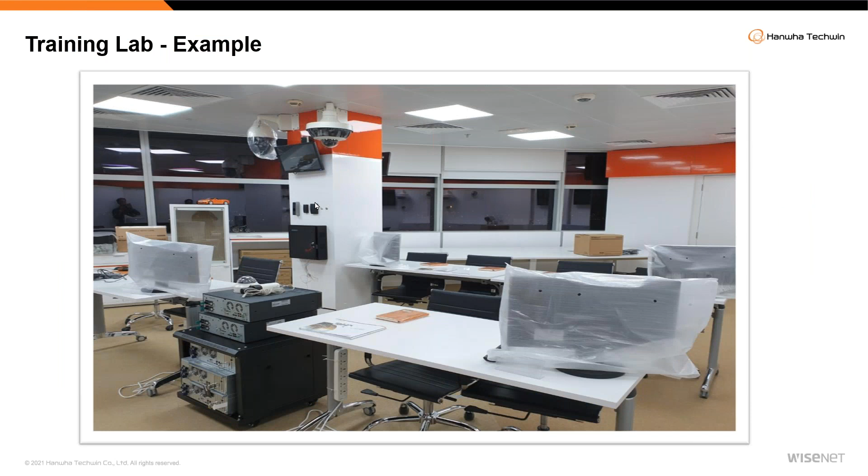Training labs - this picture is just to give you an example. It's an old picture; a lot of updates have taken place since then. Just to have a look and feel of the cameras, you can see the guys here installing the camera, plugging it in, with the NVRs set up, getting a good feel of the products.

All right, next is vendor manufacturing and quality process. Just have a look at the video, and then I will take it from there.

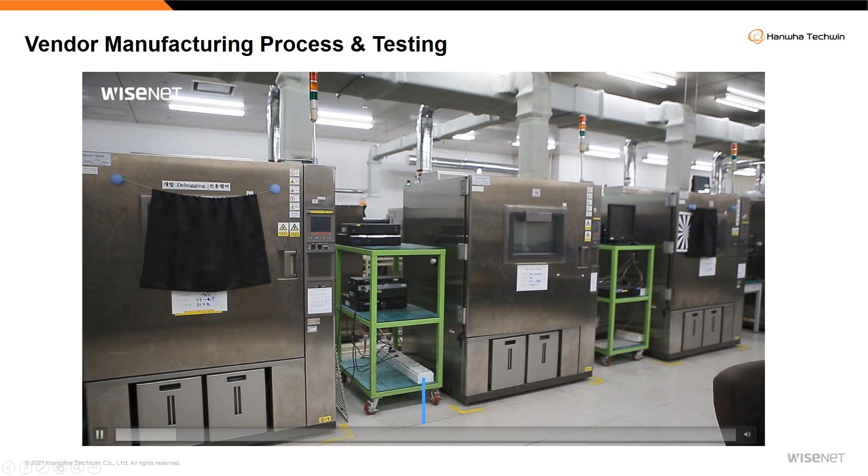So what all did you see, starting with the camera and the initial testings? For example, every camera that is being manufactured goes through 7 stages or 5 stages, depending on the vendor policy. The initial stage is to gather the requirements and specify the camera, what it should handle, how it should handle, what conditions it should operate in. Then they develop it, test it, go back again, add components if testing failed, and test it again. It's a cycle before the final product gets released.

Here is a sample of a lab where you see chambers for testing camera reliability, if the temperature increases above a certain level, if the humidity increases above a certain level, or both at the same time. These are called ALT testing. Then there is HALT testing. Some vendors test only temperature increasing, then close it, then test only humidity increasing. But some vendors test both separately as well as both at the same time together. What if both go wrong at the same time?

These are certain points done as part of manufacturing and testing, and they have nice documentation uploaded on their website. You can download and check it. That gives you some insight on how the vendor is performing. Or if you get a privilege or option to go and visit the vendor facility, you will also be able to witness this live.

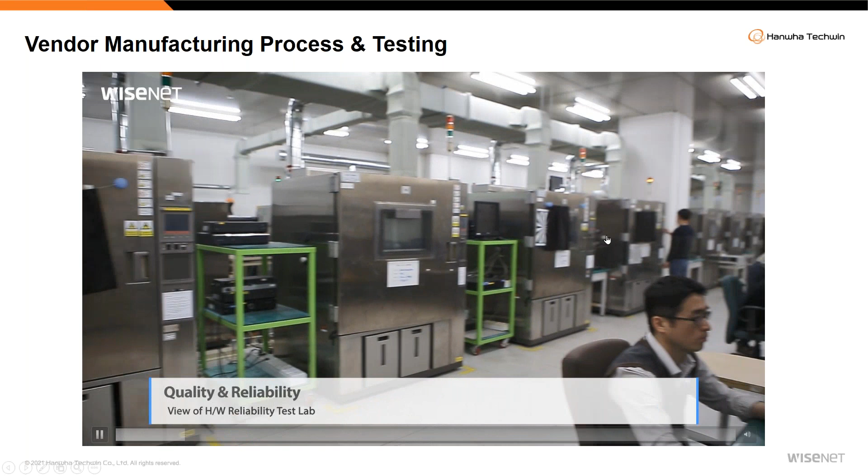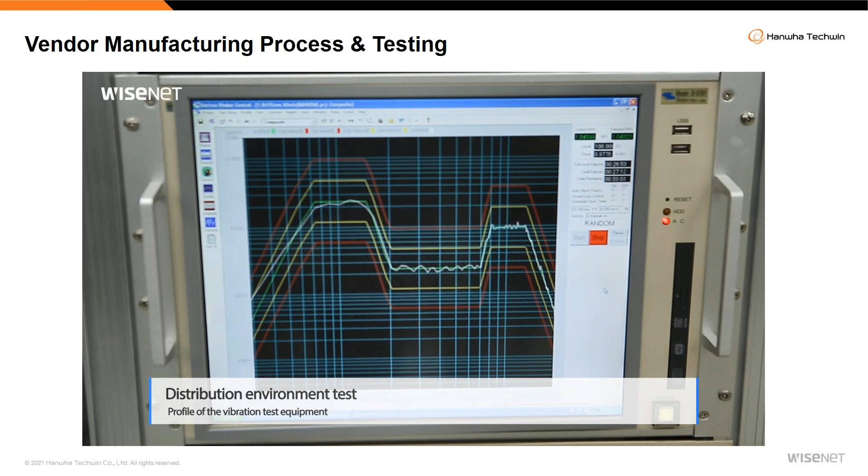Then there are tests like drop testing and vibration testing. So with drop testing - what if during transportation, which is not the responsibility of the vendor, the RAM card or the chipset falls away? You will get a dead on arrival camera, dead on arrival NVR. Sometimes when you unbox and plug in the server, there's no response, the screen is blank. Why? Because some card fell off during transportation, or maybe they accidentally threw the box, so it could happen.

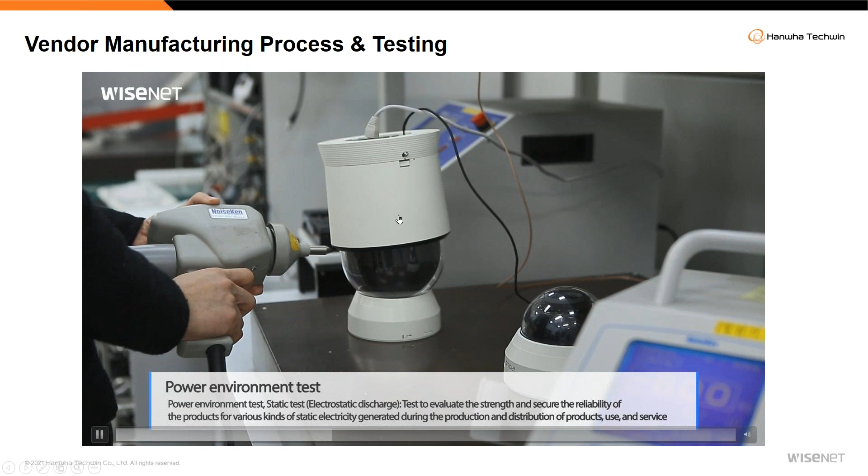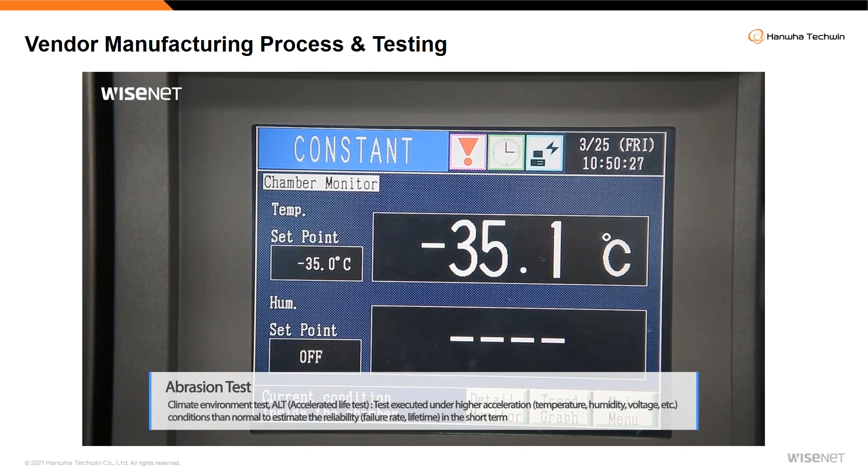Then surge protection - what if someone accidentally powers the wrong power supply? Will the camera blast off? These are certain things a vendor tests to make sure that the product, when it reaches you, even if it goes through some accidents, is still alive and running. What is the worst case scenario? If the camera is dead on arrival, there is a lot of time lost for you to call and figure out the process for returning it. So all this can be eliminated when quality and testing teams do a little bit of extra effort to make sure the product is in the same condition as shipped.

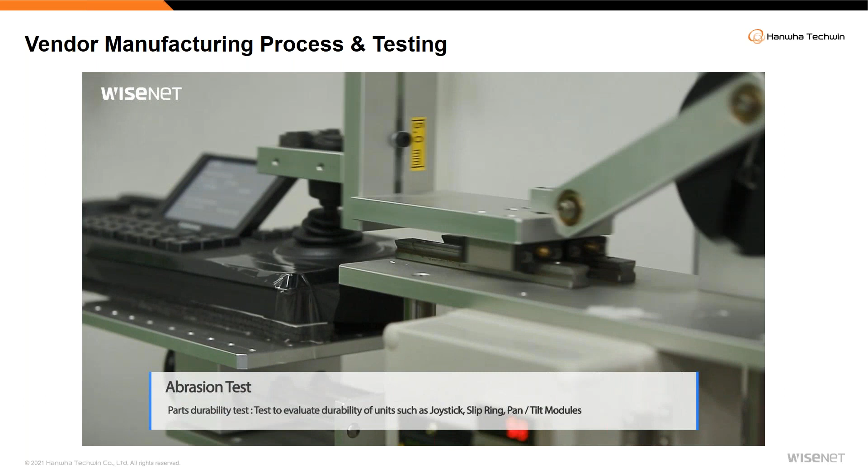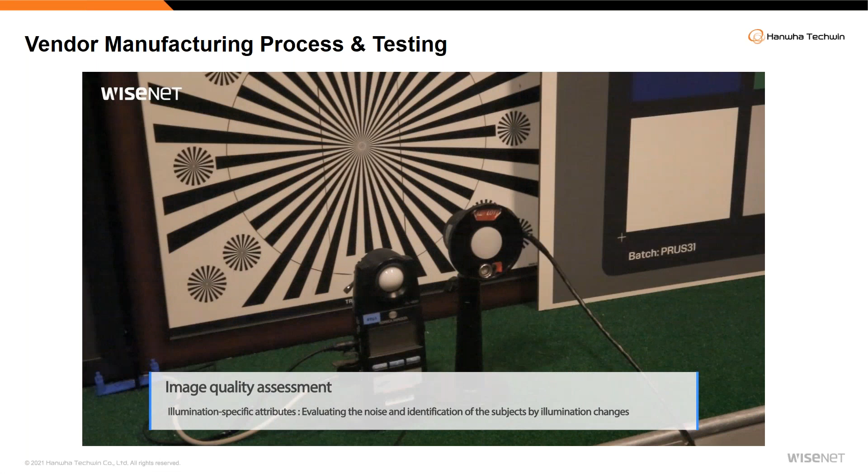Then of course, image quality testing. This is diverse - every vendor has their own method, own programmers, own software developers, how they define imaging. This is something you have to witness to see. But generally, how good it can differentiate the color, how good it can reproduce the color, how good it can perform in daytime, nighttime, and different lighting conditions - these are the things they go through.

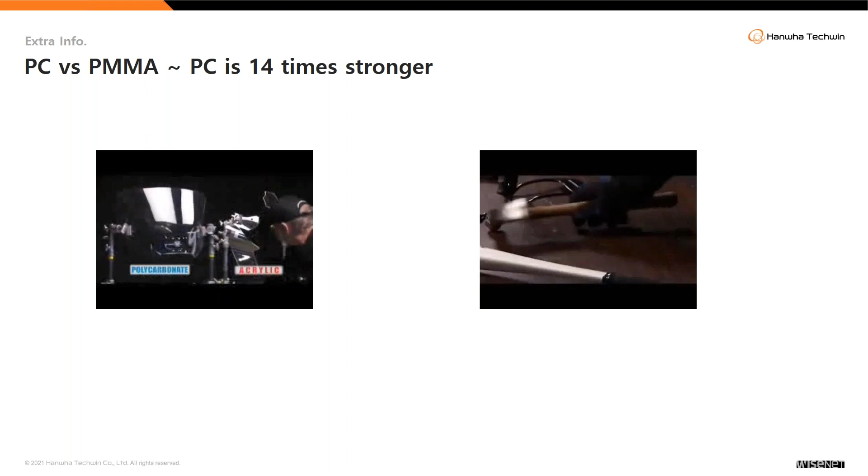So here the guy is taking a stone and throwing it - watch this video. A normal glass bubble breaks, but if it's polycarbonate, you can see the impact - he's throwing it with the same force, and it withstands. Another example: glass with a hammer breaks, again with the hammer on the glass it breaks. What about polycarbonate? It withstands. So they're both used for the bubble of the camera.

Standard can break, vandal resistant can withstand. If the camera is at a reachable height, you must use vandal resistant. If the ceiling height is very low, you must use vandal resistant. If the camera is installed outdoors, you must use vandal resistant.

Next is fixed lens, varifocal lens, and zoom lens. Fixed lens - let me take an example. Okay, now mind.

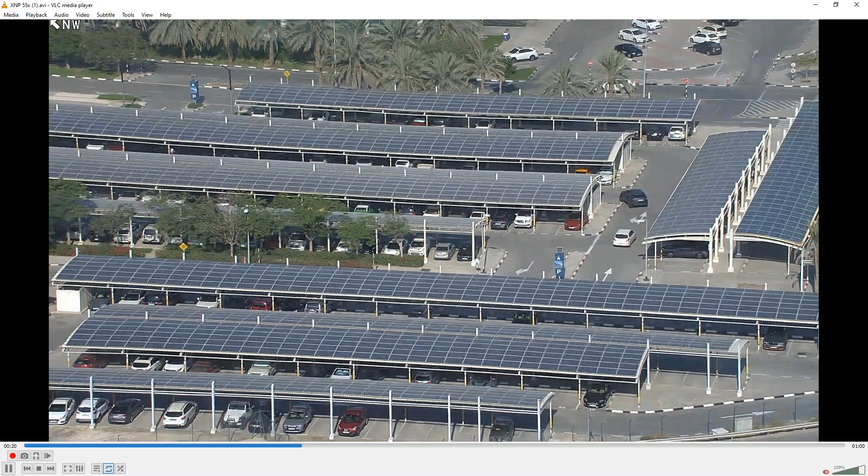Okay, next is a zoom lens. The objective of a zoom lens is, let's say, when you want to zoom a very long distance, more than 100 meters, up to 500 meters, and capture the details of a car or a person, then you use a zoom camera. These zoom lenses are quite big, so they usually come in bigger sized cameras called pan tilt zoom cameras.

What is a pan tilt zoom? Right now I zoomed in and zoomed out—you can see I'm zooming out almost a kilometer now. I saw a car moving and wanted to see the number plate, so I click on that area and it starts to zoom in so I can see the number plate. I can even move the camera left and right—I'm moving it slightly to the right now.

Okay, one more example. Zooming in, I can move the camera as I please. This is called pan, tilt, zoom - move up, down. This flexibility is available in PTZ cameras. You can see the 6550RH, this is our pan-tilt-zoom camera. They are not small, they are quite big size, used outdoor most of the time. There are also indoor pan-tilt-zoom cameras used in data centers or in large storehouses, warehouses. They also use pan-tilt-zoom cameras indoor.

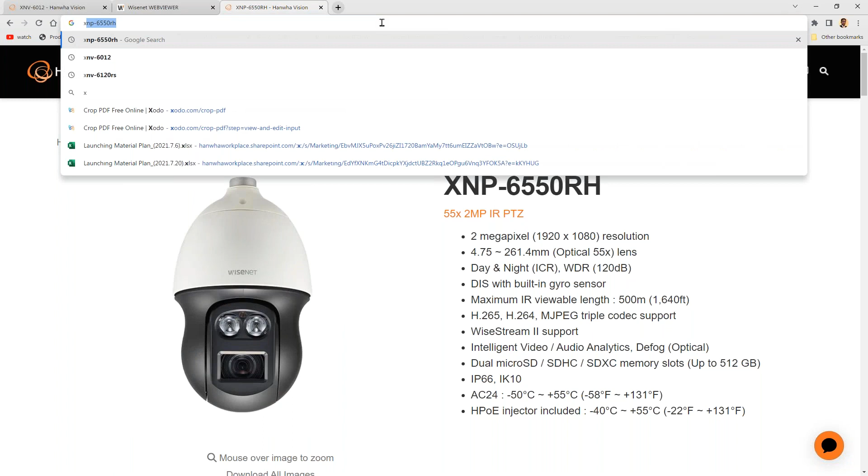There's a question on the SIRA regulation. In the SIRA regulation, you can use zoom cameras. For example, XNZ, there is one model like this, XNZ 6320. These are not pan-tilt, they only zoom. They are fixed cameras. We can check the new model later. So these are zoom only. Why do they use this? Because the focal length is 142mm. When we do the identification recognition criteria, we will see why you need this kind of zoom lens.

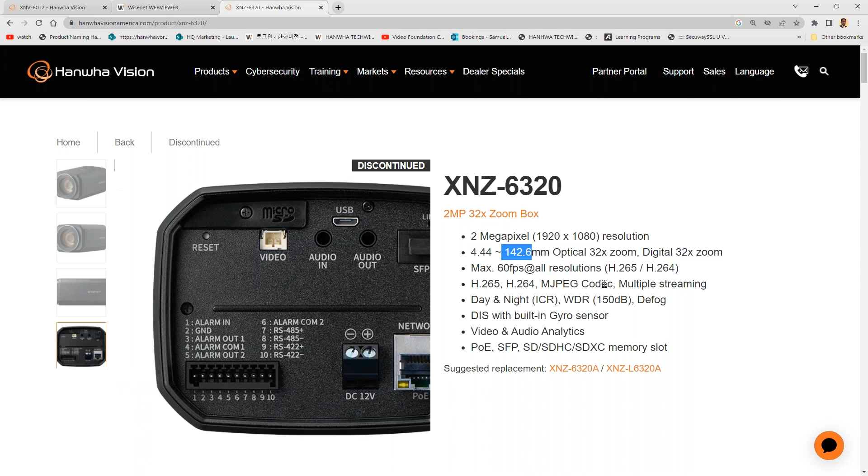It could be, in a very large warehouse, you want to monitor the entrance. But if you mount the camera maybe 50 or even 60 meters away from the entrance, very far from the entrance, in that case you need a very big zoom to capture the entrance. Imagine an airport hangar, let's say an Emirates flight airport hangar. They're painting the aircraft, or they're doing maintenance on the aircraft. That warehouse will not be small, it will be very big, and the entrance will also be very big, and the camera will be mounted on the other end of the warehouse and zoomed in. So when you have these kind of exceptions, then you use these fixed lens with a very high zoom. But otherwise, we don't see a use case for them.

Mostly PTZ cameras, yes, because you can go left, right, up, down for investigation. Why are PTZ cameras useful? If you want to track a person, track a car - chase a car, follow a car, or you have a VIP you want to follow. Any public property where you're expecting VIP guests, you're monitoring a very large area, especially city surveillance - we cannot put a camera every 10 or 15 meters, you have to put one every kilometer. But if an incident happens, you want to zoom in and see what happened, what is the current situation. So PTZ cameras are very powerful, they can reduce the cost because one camera is enough for a kilometer, and with the zoom lens you can do this.

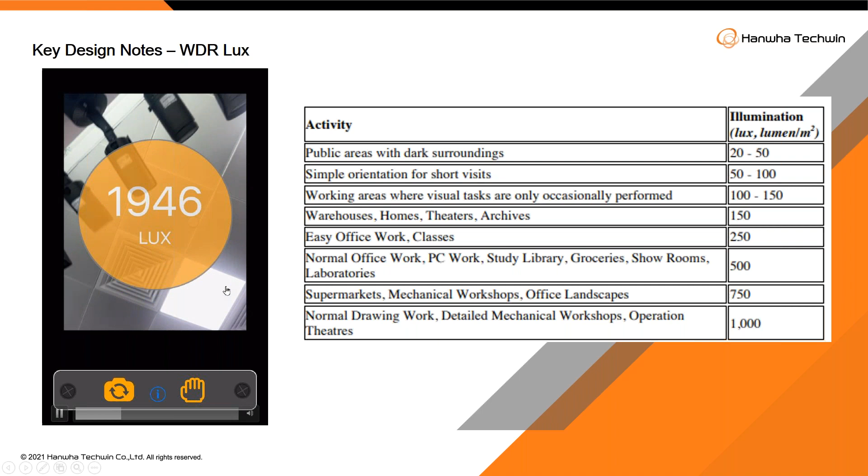How is lighting measured? Lighting is measured in lux. So let's say you have a lux meter and you put it directly below the light - it's around 2,000 lux at that level. And you put it under the table or near the sun - close to the sun it reaches easily, and near the window about 10,000 lux.

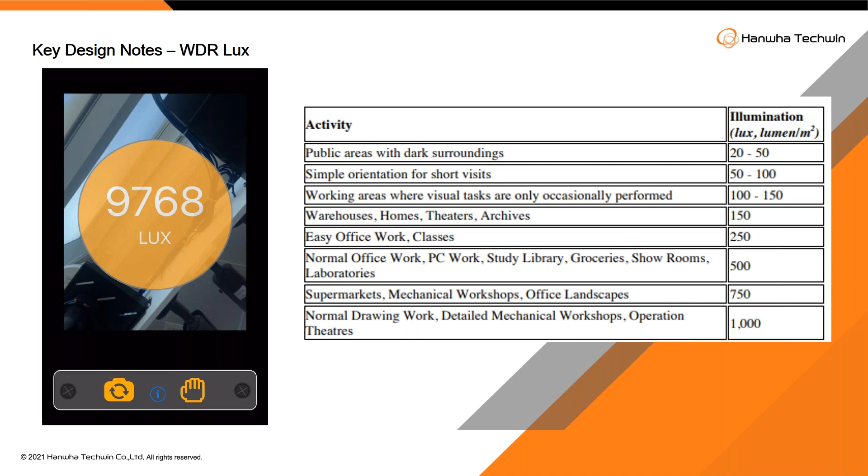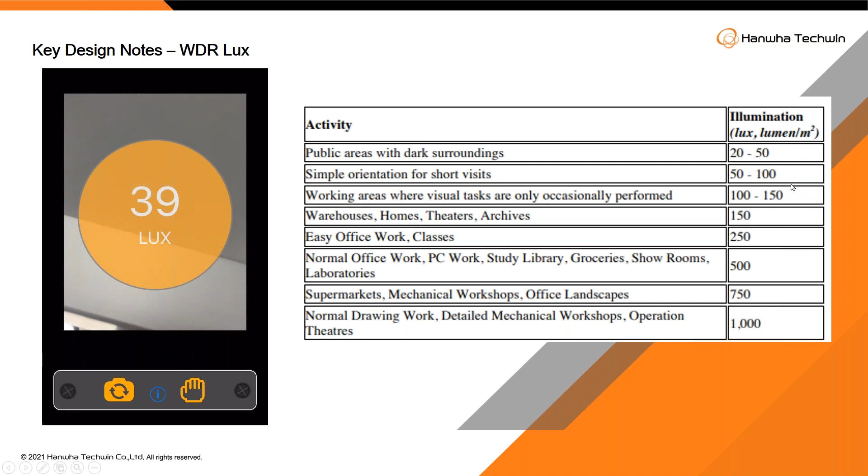Now when I put it under the table, the light level drops to 30, 40, 20 lux. So light is measured in lux - the higher the lux level, the higher the brightness, the higher the light. Most offices only run at 200 lux - that's the standard because you have to pay for the light.

Sunlight, no one is paying for it, God is giving. Sunlight is easily 10,000 lux, up to 200,000 lux. Now, when you have two different lighting conditions, take the ratio. If your indoor lighting is 200 lux and outside sunlight is 10,000 lux minimum, your light ratio is 50 to 1. So for every 1 lux indoors, in the same scene the light at the background is 50 times brighter.

How do you understand this? Look at this scene. Indoor office is 200 lux or 100 lux, outdoor sunlight is around 10,000 lux.

Now, the camera is not a human eye. It is copying a human eye, but it's not a human eye. So the camera can only understand whether the scene is too bright or too dark. If the scene is too bright, it will automatically close its iris, close its eye to reduce the light. So when a camera is looking at this too bright sunlight, immediately it closes its eye and the image becomes very dark.

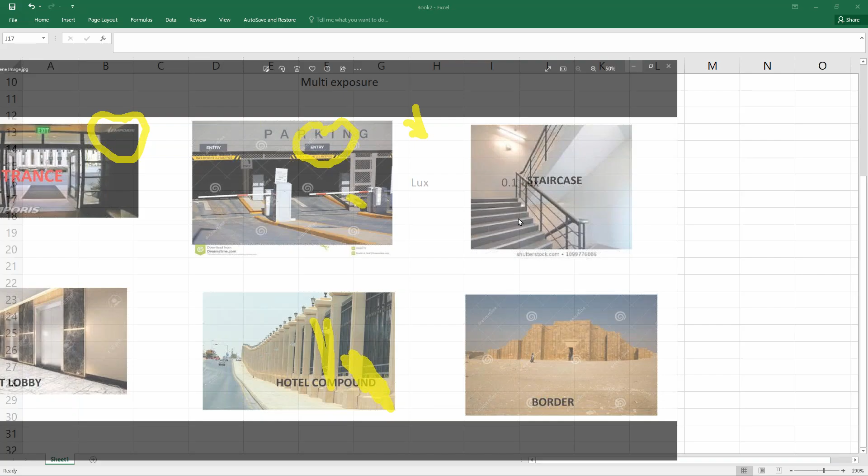Okay, if you take 0.1 lux and the sunlight is let's say 100,000 lux, what is the ratio? Higher number divided by the lower number, the ratio is 1,000,000. Now if you take the log value, log of this, 6 to the base 10, log to the base 10. 6 into 20 is 120. So log is measured in decibels.

Why did we do this? Because it's easy to measure in this value rather than mentioning in the datasheet the ratio 1,000,000 is to 1. So they use decibels, 120 dB. So if the scene is having a dark scene as well as contrastingly a bright area in the same scene, that scene requires 120 dB. So the camera should handle a contrast of 120 dB. That is how it is considered.